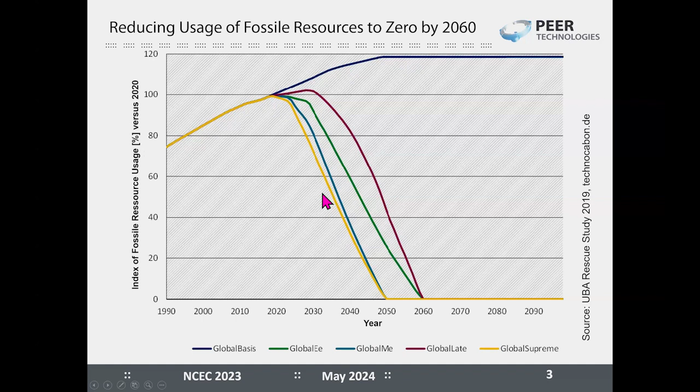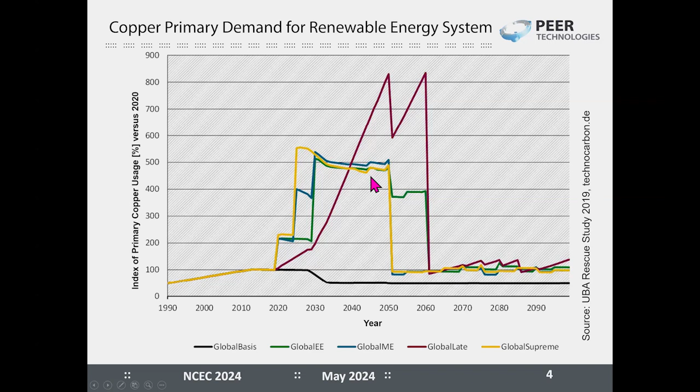The extremely high 800% peaks in GlobalLate are caused by the delayed and then compensatorily high expansion of countries at different speeds globally. So there are reasons to be very careful with copper demand, I think.

Copper electrical conductivity exceeds that of aluminum by 50%. Thermal conductivities are practically the same. Therefore, an electrical motor with aluminum windings needs conducting bars with 50% more cross-sectional area, given the same efficiency. At the same time, aluminum stator and rotor windings have 45% less weight.

In essence, the dynamic performance characteristics of aluminum motors may easily outperform those of copper motors. This is the case for this 360 kilowatt traction motor generator on slide number 5 here.

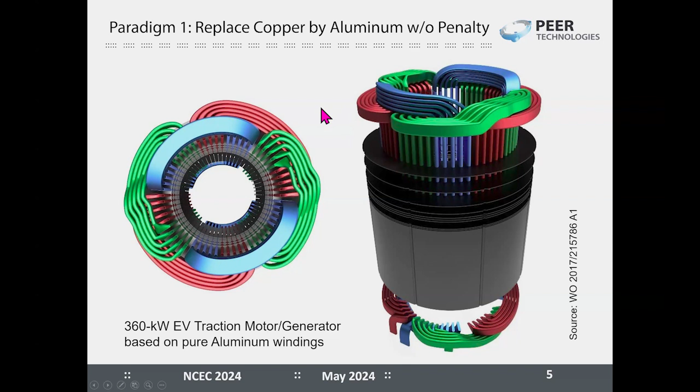Electromagnetic sensors and actuators usually use cylindrical coil arrangements to generate or measure electromagnetic induction. Cylindrical coil arrangements can be converted into flat grid structures by cutting them along a surface line and then connecting the cut ends of each side with a bus bar, which is what you can see here. The bus bars eventually are best terminated by current sources.

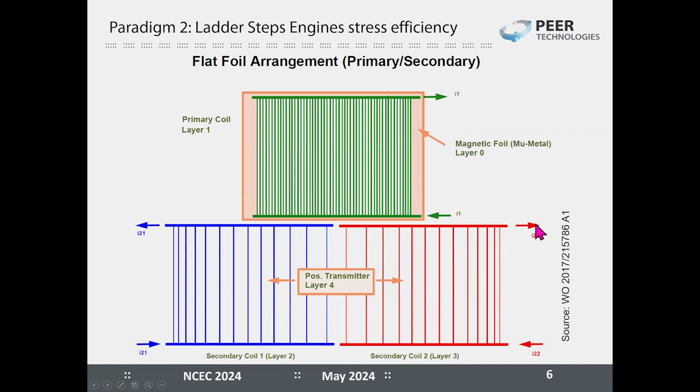In this way, equivalent grid structures are obtained, which are basically flat and free of intersections. Path or angle information is encoded with variable conductor density, as you see in the lower half. The same is true for the angular distribution of current densities in the stator or rotor of an electrical machine. The arrangement in this slide therefore shows a perfect flat displacement sensor. The sensor signal is typically evaluated when the signal terminal voltage is 0 by short-circuiting the ends of the sensor itself.

Please let me share 2 transient simulation products that were developed for my students originally. In the left half, we see an angular sensor recording the rotor speed for the engine control. In the right half, we see a 3D motor model with stator rotor induction in the XY cutting plane. The excitation frequency is 50 Hertz.

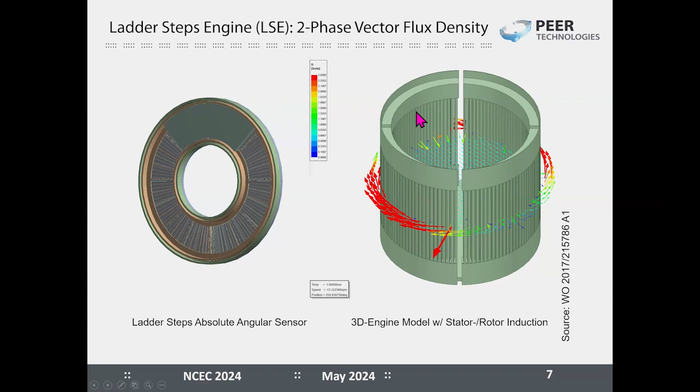2 phase currents are applied to the first and third quadrant and to the second and fourth quadrant respectively, shifted by 90 degrees against each other. The red induction vectors emanating from the stator rotate clockwise and continue to generate a uniform induction field inside the rotor, which also rotates clockwise. So this is what we can actually animate. And you will see the stator just staying in place and the rotor rotating clockwise under the internal induction field.

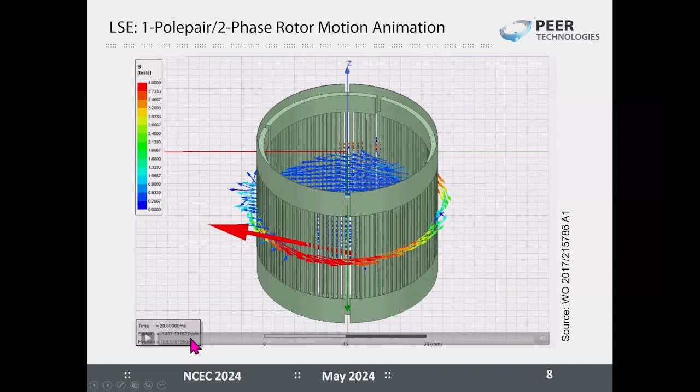Let me come to the real meat, which is a ladder steps engine, any pole, any phase induction motor, which can have, as the name implies, any number of poles and any number of phases. In this LSE engine, the rotor on the right side is simply copied over to the stator, and it looks basically the same as the rotor. That's the new thing. The only difference is that the top end ring in red color allows for the sourcing of the individual transient stator phase currents.

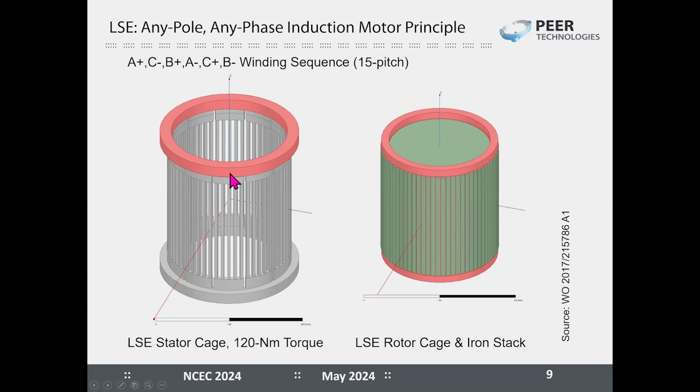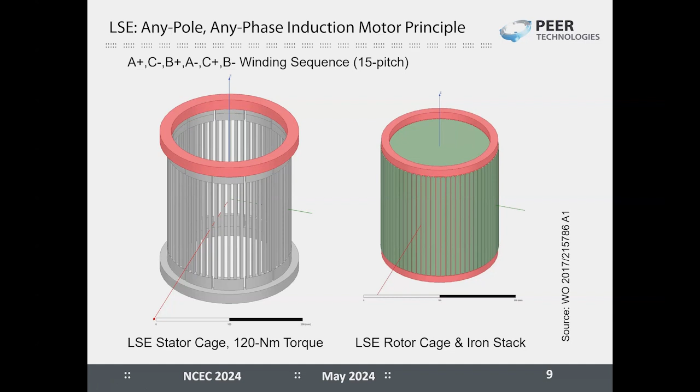The stator depicted, for instance, features 5 adjacent stator slots per phases ABC with a constant pitch of 15. Sourcing of currents may be done by either incorporating active currents or by allowing individual planes for the phases A, B, C. It's important to note that the end ring short circuits all stator windings and thus closes all stator slots across the end ring individually.

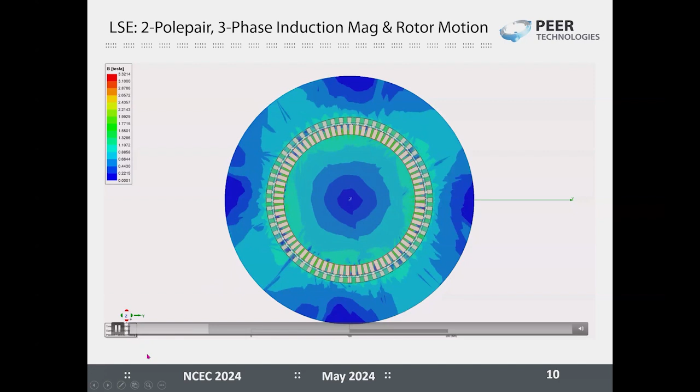One and the same stator may be used to build any of the existing electromagnetic motors, like the induction engine, what we have seen here, or a synchronous permanent magnet motor, or a reluctance motor. For comparison, the performance of this ladder steps engine motor I just showed you is the same as the one with the aluminum windings, namely 300 kilowatts, 360 kilowatts at 30,000 RPM.

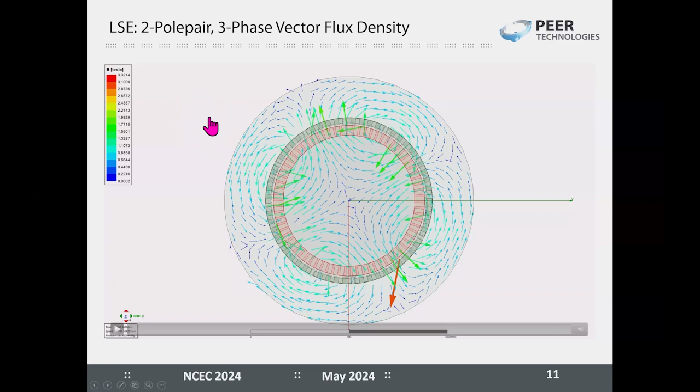The ladder steps engine patent that I just showed you blocks any further development because it's a basic patent, not just a device, but a new paradigm, and it's patented in the European Union, the United States, and China, and of course also in Canada. So what we would like to offer actually is to invest more into this new paradigm, and we would like to help with a global head start in electric mobility, and it also applies to many other electrical systems.